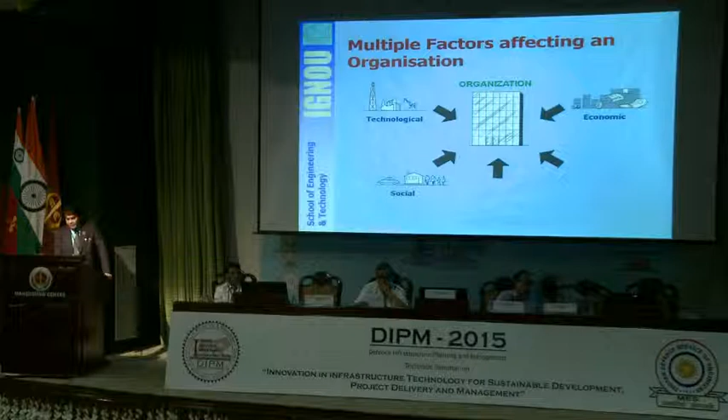In an organization, it may be technological, it may be economical, it may be social, ethical, and lastly political and legal also. If you have to take a decision which is purely on the technological front, there is no problem. If you have to take a decision purely on an ethical basis, there is no problem. But the problem is when you have to take a decision where there are so many influencing factors working; before taking that decision you have to consider multiple criteria.

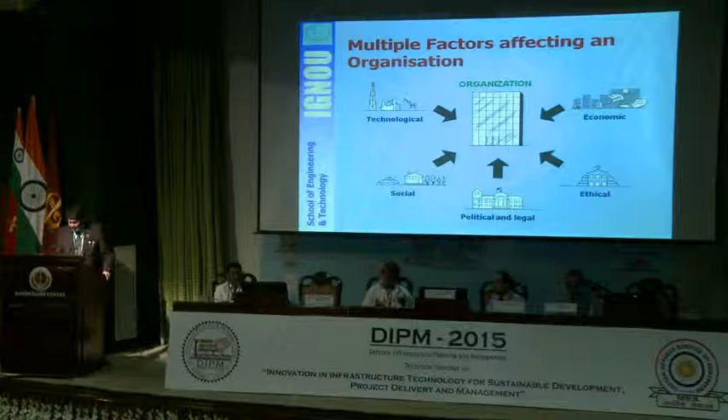You have to take the decision under the influence of multiple criteria, and those criteria are sometimes conflicting in nature, and at that time decision making becomes very, very difficult. I gave some mathematical technique which is normally used in management. I have tried to use it in infrastructure project selection.

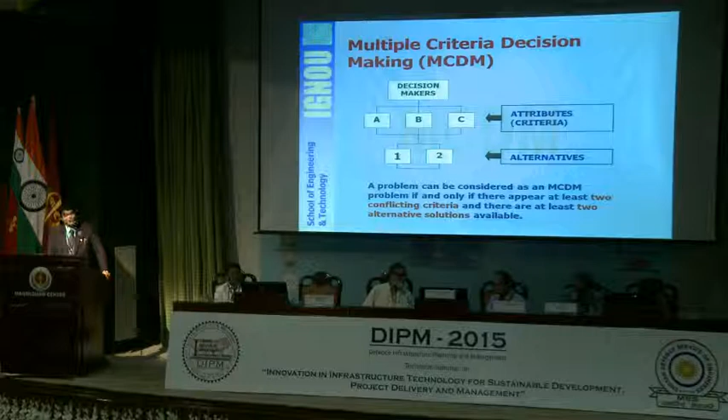This is what I said, that A, B, C are the attributes or the criteria, and 1 and 2 are the available alternatives. You have to choose one alternative out of these under the influence of the attributes A, B, C, and this is called a multiple criteria decision making problem. In civil engineering, at many places this technique is used, in bid evaluation or succession planning, and so many places.

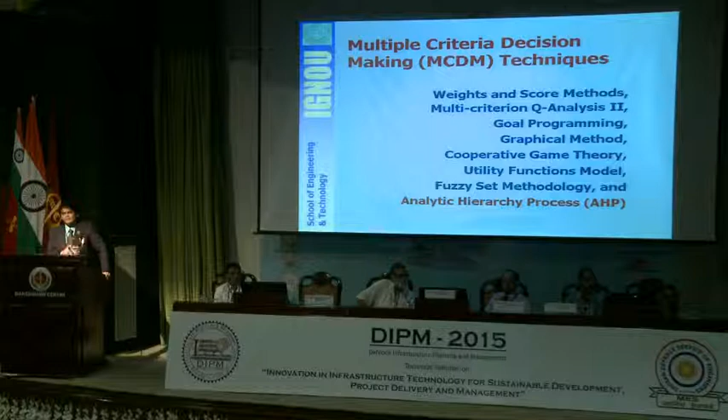There are many methods available for multiple criteria decision making. These are listed on the screen, but the last one, which is put in red, analytic hierarchy process, is a very common procedure which is used in different places, normally in the manufacturing sector, but here we have tried it in construction, particularly infrastructure project selection.

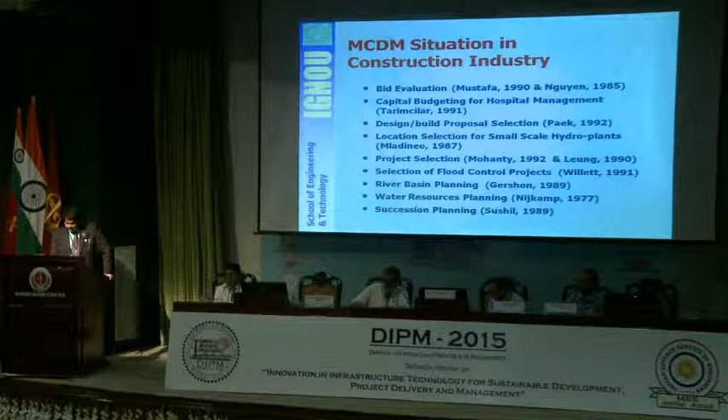These are the places where in civil engineering this multiple criteria decision theory is used: bid evaluation, capital budgeting, design build proposal selection, location selection, project selection, selection of flood control project. These are so many studies which have been done by eminent scientists and researchers in the past.

Here in this technique, the first thing we do is decompose the whole problem and then establish the priorities with respect to the goal, and in the second stage the attributes or the criteria are there. These criteria, with respect to the goal or the objective, are to be rated, and thereafter for each criterion the given list of available alternatives is evaluated. So we will see how it is done with the help of a case example. Just in the next 5-6 minutes I will be completing this.

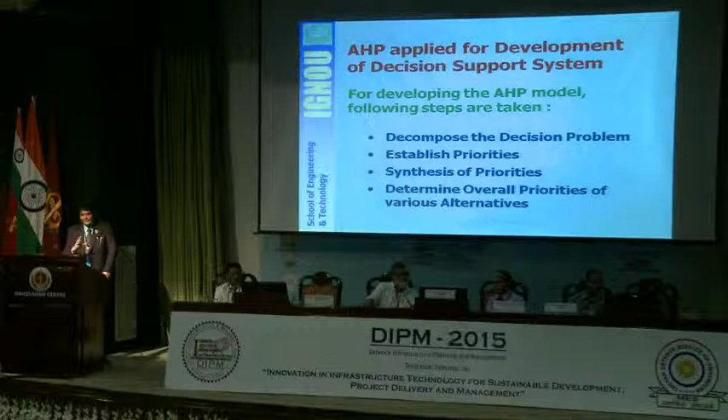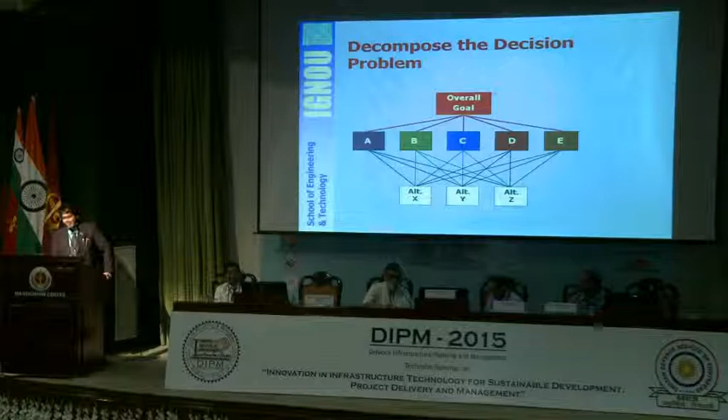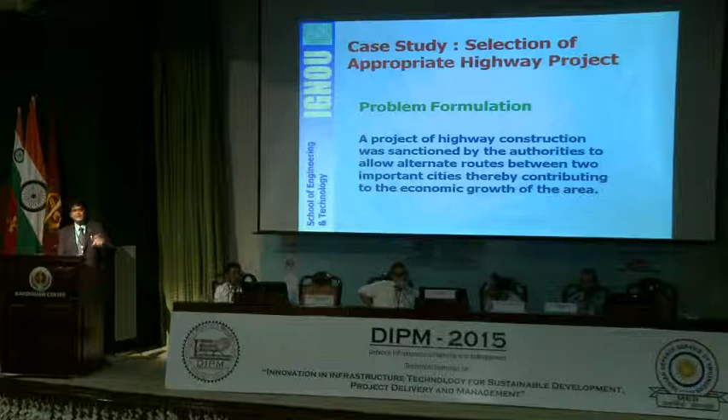We'll directly go to the highway project selection case study. Here the case study is that a project of highway construction was sanctioned by the authorities to allow alternate routes between two important cities, thereby contributing to the economic growth of the area. So now A and B, two cities, are to be connected by the highway, and these are the factors to be considered: capital cost, internal rate of return, mobility, safety, reliability and comfort, maintainability, travel impedance and environmental impact. These are the criteria under which you have to decide the alignment of this highway project. I will also show you

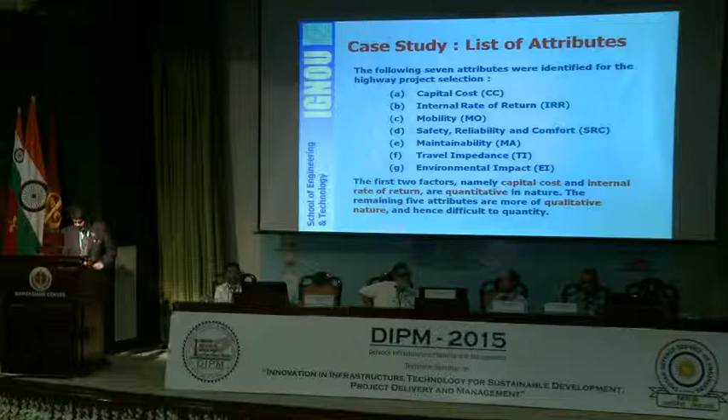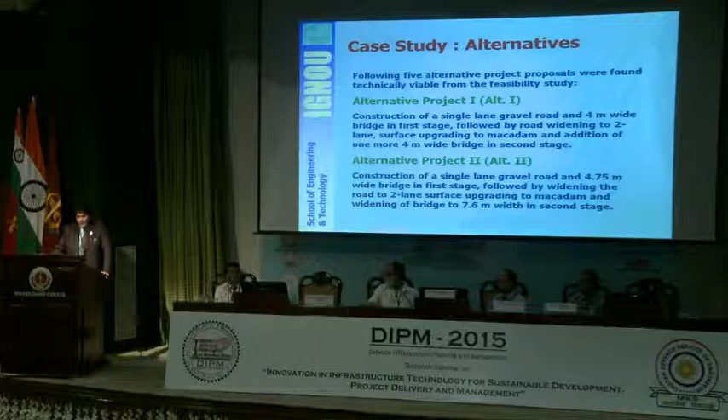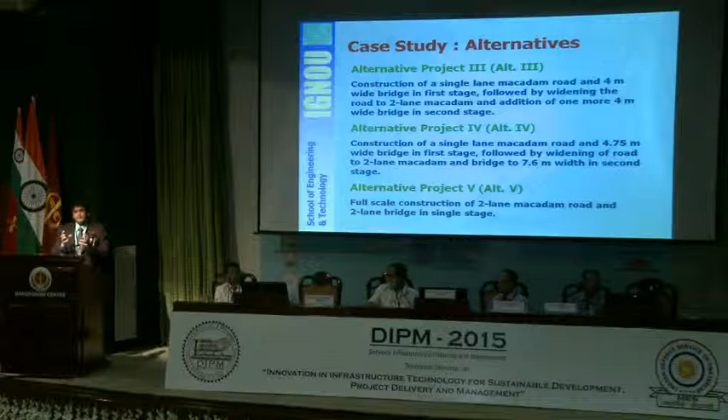the alternative projects, like project 1 says the construction of single lane gravel road, 4 meter wide bridge. These are the specifications of alternative 1. That way there are specifications available for alternative 2. 3 is the construction of single lane macadam road and a 4 meter wide bridge in the first stage, followed by so many alternatives, and so many criteria also within which you have to operate and take a final decision. So how will we do this?

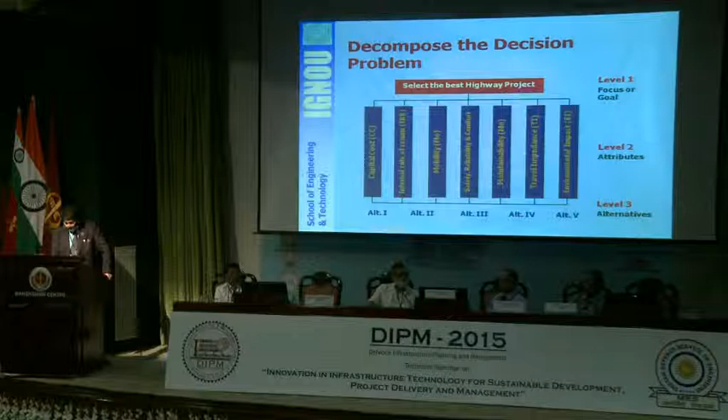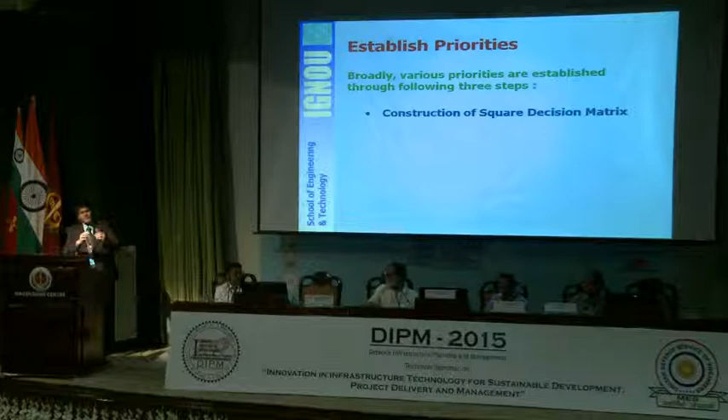We have decomposed the problem in a hierarchical manner. Select the best highway project is the objective. Then in the second stage all criteria have been listed, and finally at the bottom alternatives 1, 2, 3, 4, 5 are listed. These are level 1, level 2, level 3 of the hierarchy. Now when we start, we have to do the paired comparison. As I said, with respect to the goal or objective, we have to evaluate the criteria first.

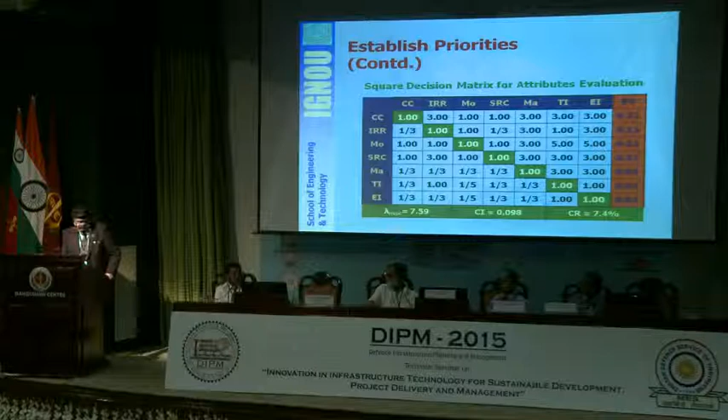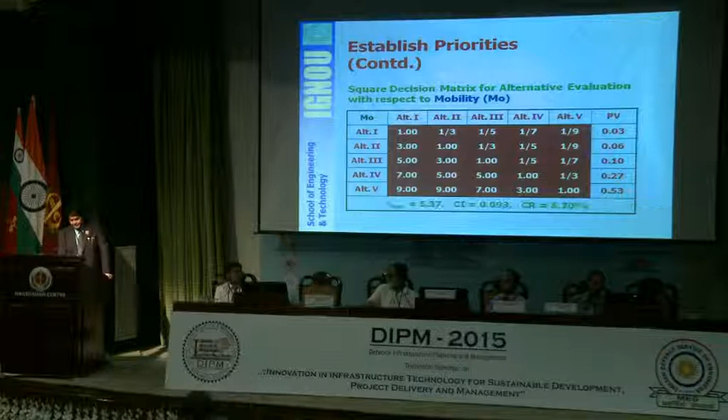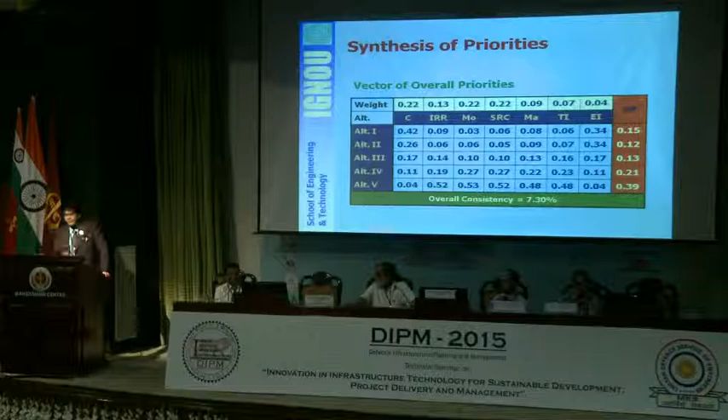In this way you do that, and thereafter you evaluate all alternatives the same way. I am quickly giving you capital cost, this is for IRR, mobility, environmental impact, and finally when we synthesize everything, in the top row you are seeing the weightages of the criteria, and then the alternatives evaluated with respect to different criteria. The last column shows the weightages of those alternatives available for highway selection.

So finally if we see the project ranking, alternative 5 is coming first, and accordingly the others are also ranked. Alternative 5, which is the least desirable with respect to capital in the beginning, is now first after the overall evaluation. So these are basically some concepts of multiple criteria which I could give in 12 minutes. And these are the conclusions of where this can be applied. Thank you, sir.

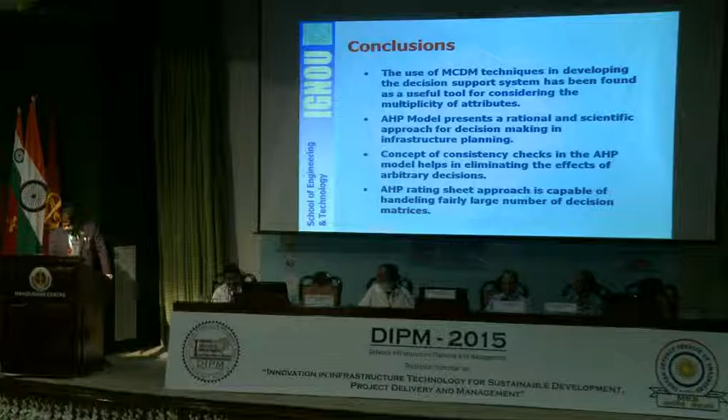Manoj sahab has made one thing very clear, that viability can be manipulated also, brilliantly. Next. Okay. Last speaker. Let us have some questions after the last presentation. At least 5-10 minutes we must devote to questions.